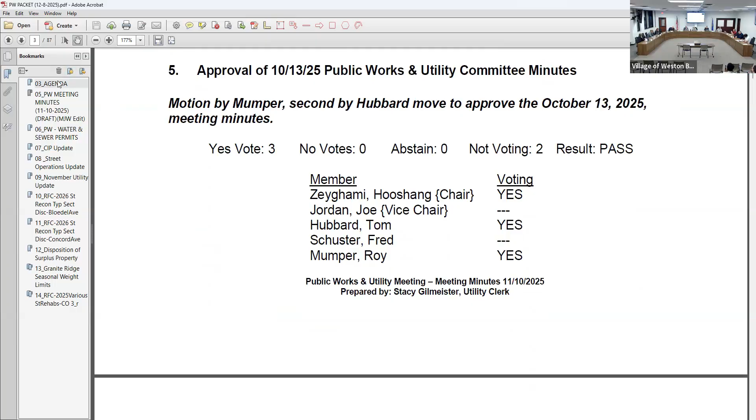Item 6, acknowledge November 2025 water and sewer permit. Move. Is there a second? Second. Discussion? All in favor, signify by saying aye. Aye. Opposed? I have it, thank you.

Item 7, CIP update. Michael? I guess our projects are done for the winter here until spring. Fuller, Weston Ave, and Schofield Ave all got paved before the snow flew, and stayed, I guess. There'll still probably be some restoration - they'll have to be touched up on Fuller, Weston Ave and Schofield Ave come springtime.

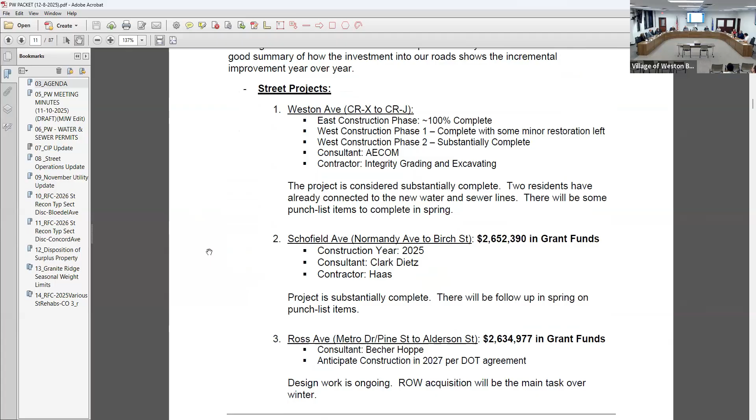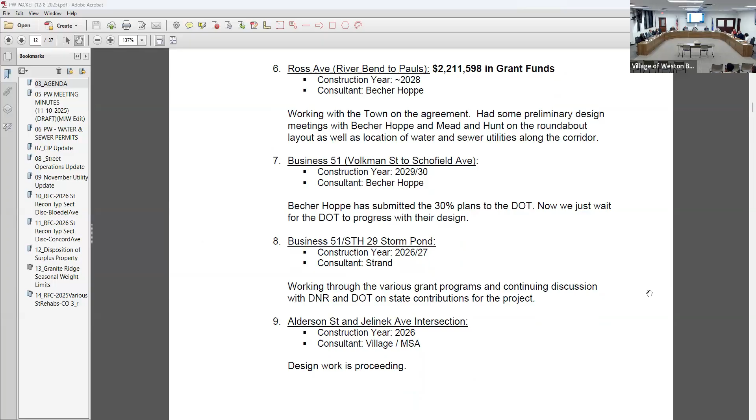Still working through design with the Ross Avenue projects. We've got a couple agenda items for the Bloedel and Concord Avenue projects coming up. For the storm pond with Business 51 and Highway 29, still working through some modeling concerns that the DOT and DNR had regarding the waste loadings for that pond, so trying to get that coordinated with them. Hopefully the DOT sees the benefit in it for their right of way and will contribute to that project.

We'll be working on the right of way for the Alderson-Jelinek intersection. Still a little back and forth with the Public Service Commission for the Well 3 PFAS pretreatment project to get the construction authorization from them. But for the most part, it's just small items they were nitpicking, so we should have that by probably the end of the year - end of the month, I guess I should say.

I did put together a little bit of a review for our pavement work in 2025. Pretty much all that we had planned to get done got done, except for a small portion of Birch Street here between Weston Ave and Cranberry. That one did not get pulverized and taken care of before winter.

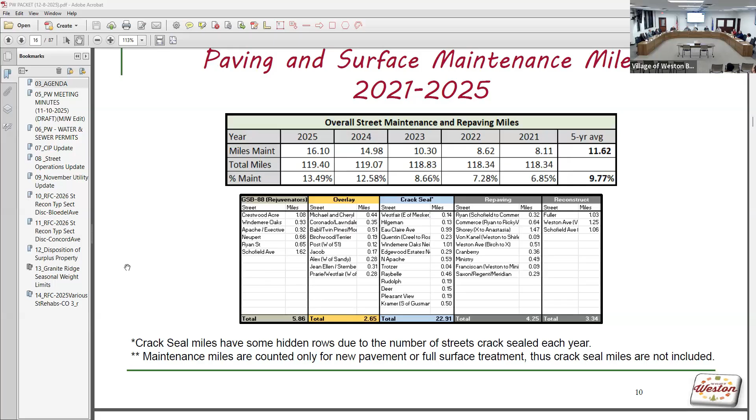Overall, as far as surface maintenance miles on our asphalt roads, we either put new asphalt down or did a seal coat treatment on 16.1 miles, which is right at 13.5% of our total miles. This doesn't include crack sealing, which we did on about 23 miles of roads. The goal is to try to get about 1/5 of our streets, so we're pretty close there this year. That way we can crack seal every road generally once every 5 years, or once every 4 years. There's some streets we just don't crack seal or try to get to because they're too far gone.

Then Forrest and Steve Lake, one of our crew leaders, went through and did our PASER ratings this year, so in kind of a summary of it from 2009 through 2025 here. I guess maybe the graph is a good one to look at.

So we kind of hit this peak in 2013. 2012 was a year where we did street reconstructions as our last year through kind of that early 2000s, and then we took a break from 2013 until about 2019 on any new roadways or reconstructions. That really showed in our street ratings. Then in 2021, which would have been the first year after, is where we kind of saw an uptick again in our better pavement ratings.

We still kind of had this poor rating slowly decrease, and really the fair to good roads is what increased during that time period. Then as we start redoing roads, we were able to help get some of these fair to good back into excellent condition, and still take care of the poor to fair streets.

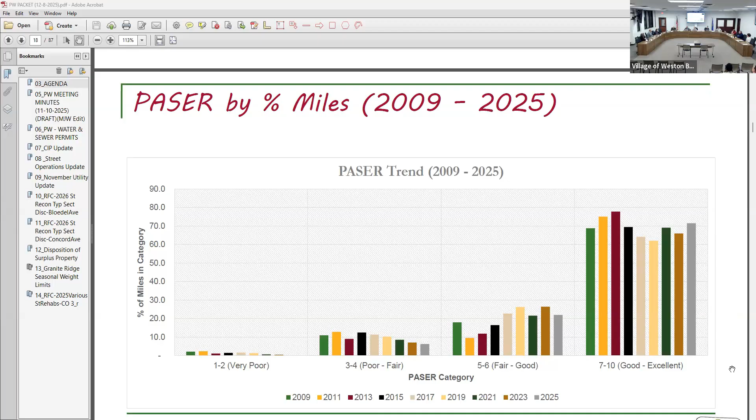We can spend a lot of money to try to make sure all of our streets are always in that 7 to 10 range. I don't think it's realistic to say we're never going to have anything in the 1 to 4 range, but we try to keep those as low volume streets with not a lot of traffic. Our arterial roads, we try not to get too far below a 6 because those are heavily traveled roads, and if they start to become too bad, it becomes hard to appease the public because that's what they see for the most part.

How much more is left to do at the hospital? Just Birch Street was the last one. So that's it? Weston after Cranberry, yeah. That's why we're issuing that change order? Correct, yeah.

That stretch between Alderson and Birch being paved, at the bicycle path area - that's gonna be paved, or is already paved? That's paved, yep.

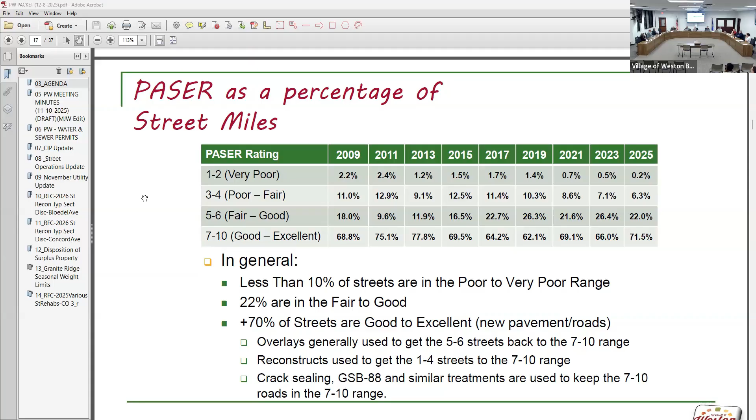And the lighting - the lighting was not approved or recommended. Probably in October, I was gonna say maybe 3 meetings ago. We shared that with Rothschild and they didn't come back with anything else. I thought you were gonna talk to Tim. Yeah, we did. Rothschild didn't bring back any sort of secondary proposal to that.

Anything else? No, just thought that was a nice little summary as we were plugging in and submitting our road miles to the state this year, kind of keeping track of how that trend looks over the last 12 plus years, 16 years. You take that survey every other year then? Every 2 years, yeah. So every 2 years we have to submit our street ratings to the state.

What is the very poor section? Probably Bushka Street - I'd have to look at what all the 1s and 2s are. Sometimes they're gravel roads, probably East Nick Avenue. Is that Bushka Street still original pavement in there? There's parts of it, yeah, this past year we had to pave probably 100 to 200 feet of it just because it blew apart.

So I thought there was no base course in there. It was granite, so when we redo that we dig out the top and put in a foot of base and repave it. But that's where we try to hedge - for the 6 houses on that road, it's passable, it's okay, not the best road out there, but when it comes to the overall picture we try to balance that. It's hard because everybody pays taxes, everybody wants their road nice, so we try to take away a little bit each year on that.

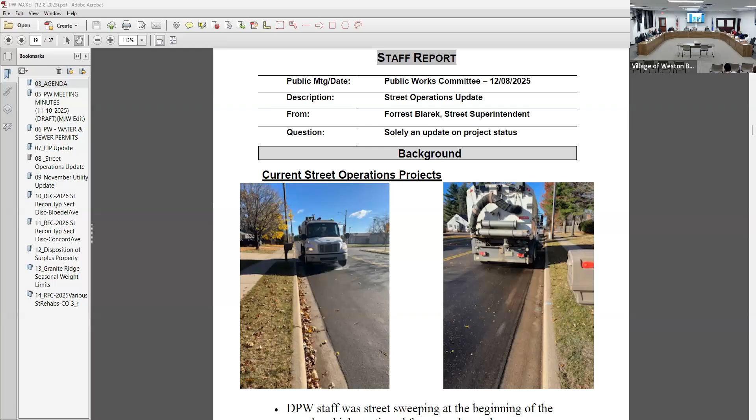Also finished up the curbside pickup. Crews were able to stay on schedule this year with both leaf and brush pickups - that was one of the first years ever. Once they went through their scheduled pickup, they went through neighborhoods that had put out more piles afterwards. Some areas got picked up 3 to 5 times, so we were able to stay on task with that.

Question - is there a better way to pick up brush? It leaves a lot of debris, people complain about it. Yeah, and I tell them, pick it up with a hand loader. With the smaller piles, the driver of the dump truck usually gets out and picks them up by hand, or any sticks that fall on the road, but with the massive branch piles, it would never get done if we had to pick it up by hand. I don't think there's any other way - I just tell them it is what it is, they do the best they can. But they still complain, you know.

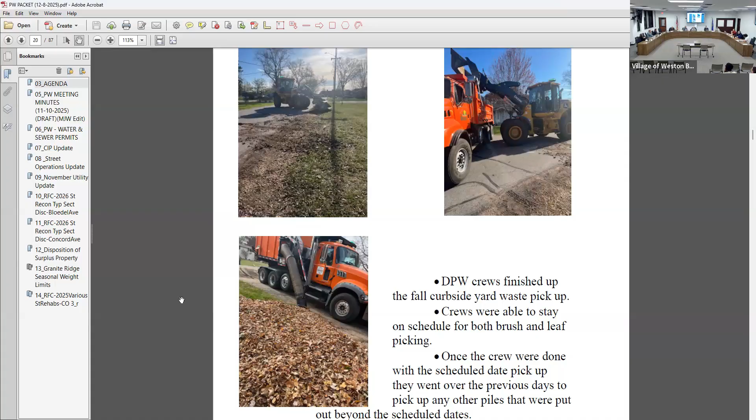Sure. Would it be good for us to encourage people, if they have a really small pile, to just talk to their neighbor and combine it into one? Absolutely, we could add that to our posting. Yep, just to put it in one bigger pile and the areas would be less messy then. That's not a bad idea.

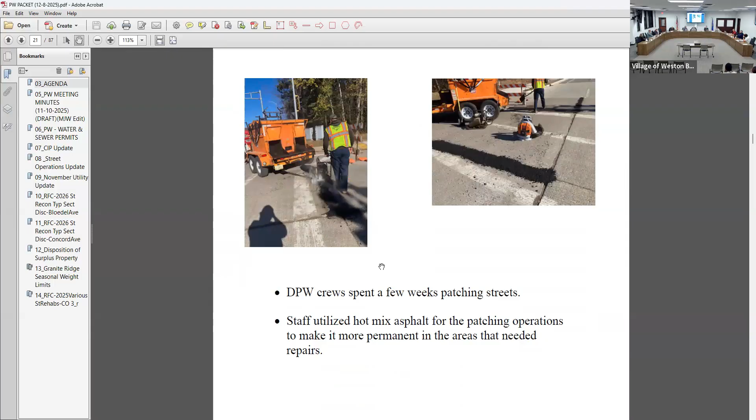So then the guys were out patching while the hot mix plants were making blacktop, filling up all the bad areas that we found. Trying to make it permanent throughout the winter, so we're not going back and repairing with cold mix.

I also did the thermoplastic around manholes and water valves. We had 2. Is it above the road or just flush with the road? It's flush, yeah, flush with basically the rim of the structure. There's no bump up or anything. That's awesome. It helps prevent the snowplow from hitting the actual structure, damaging the structure and/or damaging the plow blades on the trucks.

It takes 2 crews, two staff members each. We send them out, they pick the actual plow routes, and we want to apply these to anything that looks like it's sticking up off the pavement surface. They heat these up and stick them down.

So I guess to clarify that, these are ones that are sticking above the asphalt surface, up a little higher, and would catch on the plow blade. So these rings kind of ramp that, so as the plow comes through, it ramps up and over that.

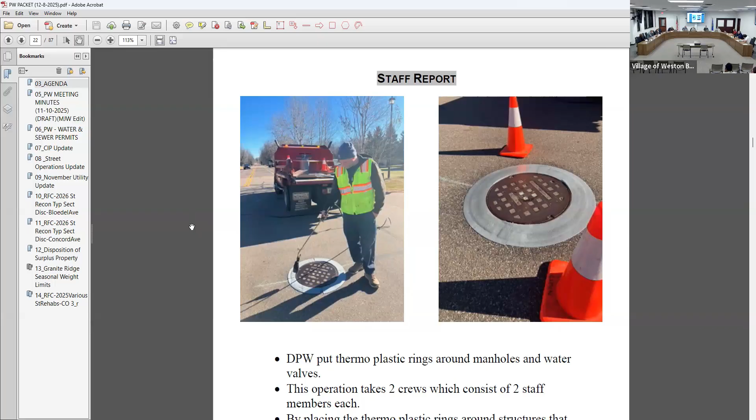I'm just gonna bring this up because a friend of mine does insurance claims for State Farm. He was at a claim recently. It was some kind of a truck like that parked on the side, they were doing some kind of work, failed to put out the safety cones. A bicyclist came around the corner, I don't know what the guy was doing, but he went right into the back of the truck. Of course, now they got a big lawsuit, and it's all contingent on did not follow safety procedures.

Yeah, I don't have the procedure for that, I don't think we have one. I would recommend that the first thing those guys do is throw out those safety cones. I mean, again, I'm not dictating, I'm just suggesting.

My guess is those two cones next to the back end of the truck are the two cones that are out here. A lot of times they'll put the cones out.

Can I finish my sentence? So the two cones in the back of the truck more than likely are the two cones out on the roadway here. We put them out as this cures, so vehicles after we leave aren't driving over it and tracking it, because it does heat it up, so it's tacky. Once it cools off, then we come back and grab the cones. The truck likely has its flashers on.

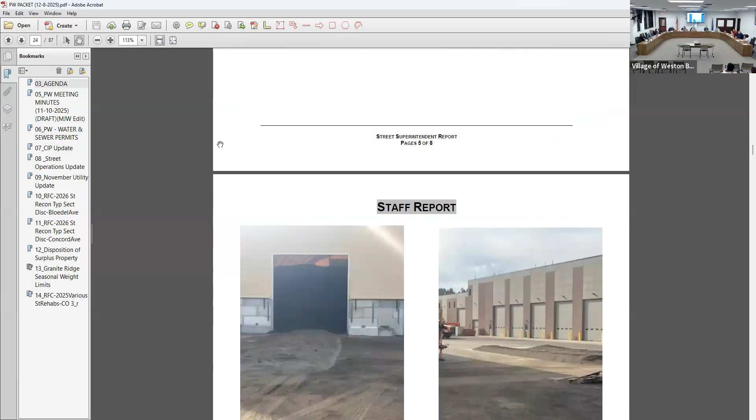Before the snow flies, in the backyard here, we had all the light poles from the Schofield Avenue project taken off, and Banner had delivered them back here, so we stripped them all down, palletized everything, organized what we're keeping and what's getting sold as surplus. It took some time, but you guys got that done, and moved it to a place where it's not gonna get hit by the snowplow. That was a bad spot for it, so we had to get that moved.

Are those light posts extra? No, those were the ones replaced off of Schofield Avenue, the old ones came here. What will we eventually do with them? They're in item 12, they're for sale. We kept a certain quantity as backups because we have other lights out in the system, so we'll have a little salvage for inventory, but we didn't need all of them.

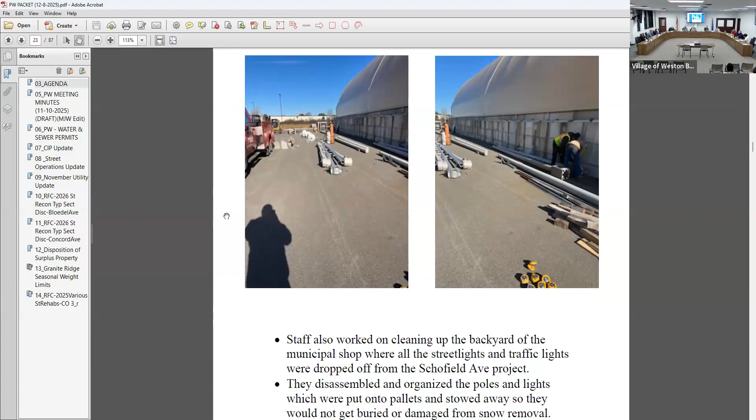We hauled in our sand mixed with the salt, about 340 yards, to fill the shed up for this year. The staff lays it out with the dump truck, sprinkles about 2 yards of sand per load for the mixture, and puts it in the storage shed.

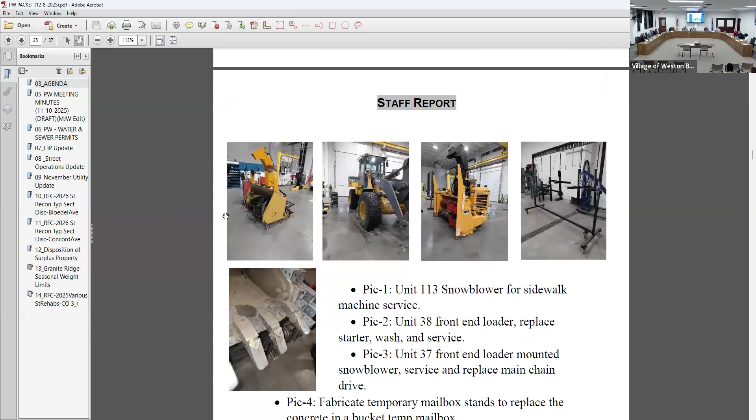And then for the shop, we had the snow blower for the sidewalk machine serviced, number 38, then the loader had its starter replaced and serviced. The big snow blower, front end mounted, had its main chain drive replaced. We fabricated the mailbox stands to replace the concrete in a bucket temporary stands, and repaired the mini excavator bucket. The other repair isn't pictured.

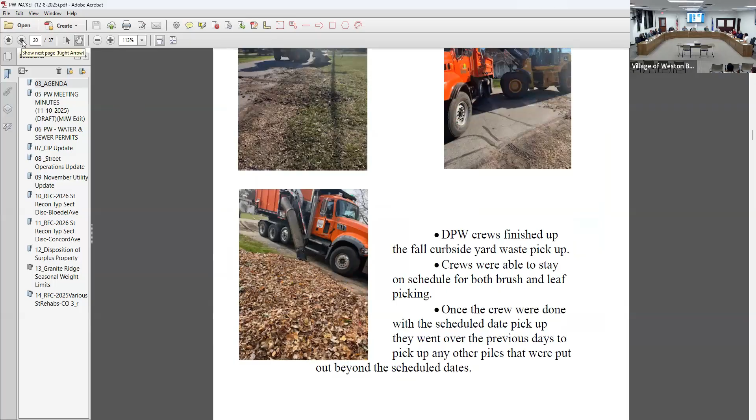Both 29 and 69 had a seasonal changeover. Both those trucks are used for leaf collection, so their radiators get really packed and condensed full of fine particles from that. The mechanics have to separate the three different types of radiators and intercoolers, take them all apart, and clean them thoroughly before putting them back. Number 60 also got its air conditioning condenser replaced.

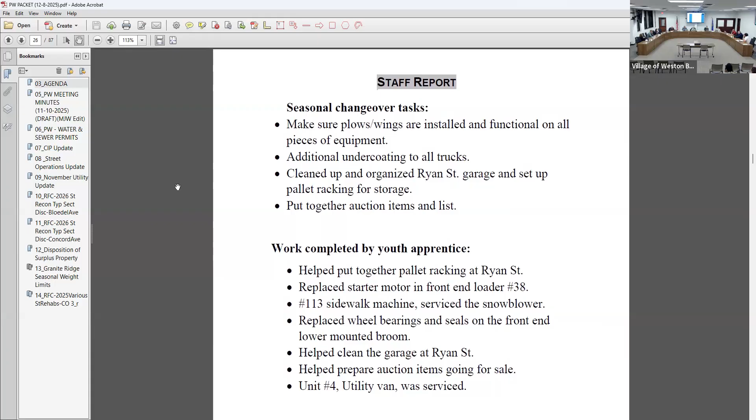Then the changeovers, making sure the plows and wings are all installed and functions are all working, plus additional undercoating for all trucks.

I cleaned up the Ryan Street garage and set up pallet racking for stuff to get stored there, and put together the auction items. The youth apprentice helped out with the pallet racking.

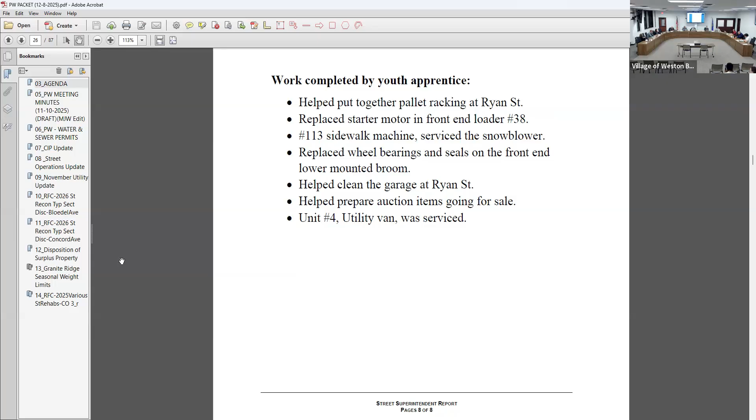He replaced the starter motor on 38, did the service on the sidewalk machine, replaced wheel bearings and seals in the front lower mounted broom, helped clean the garage at Ryan Street and helped prepare auction items going for sale, and also serviced one of the utility vans.

That's all I got. Yeah. Question for the board?

Okay, item 9, utility operation update. Sure, on the water side, we were able to get a number of items done before it got too cold.

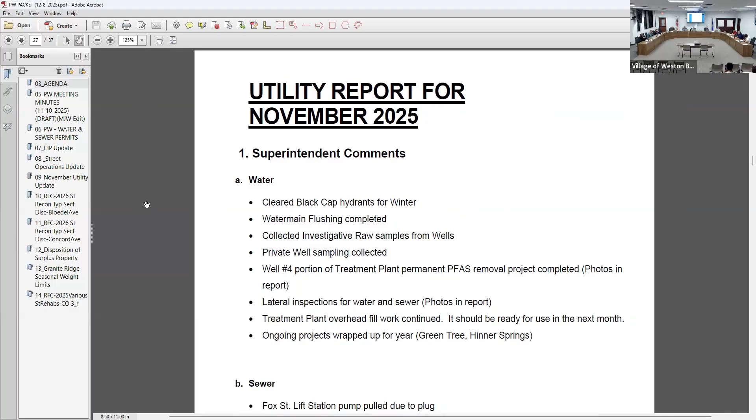Cleared some of our black cap hydrants, those are our non-draining hydrants that are in use and need to get the water out of them before the freeze hits. Completed our water main flushing just in time as well.

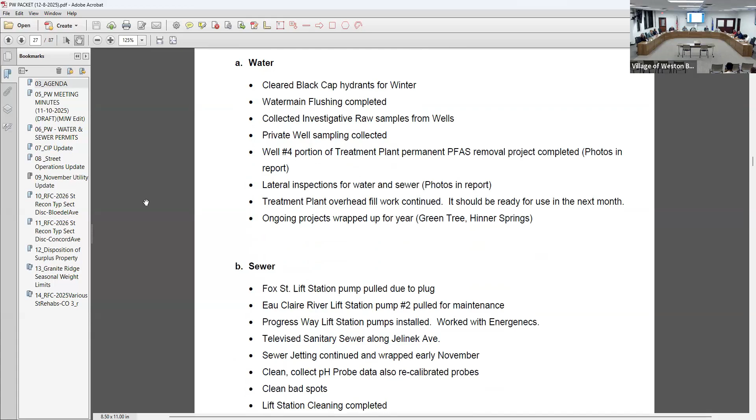Continued with our investigative quarterly raw samples for all of our wells. Once we get that, I can probably put a new graph back into the report maybe next month.

Continued with some of our private well sampling. The well 4 portion was probably completed at the last meeting, but there's still a little bit of punch list stuff, items, some tank labeling. Hopefully there's no more interviews that need to be done about it.

Boucher, you can still call, just not Wednesdays at 2 o'clock, that doesn't work. All right, I'll do that.

We continued with a few lateral inspections, they're slowing down. A couple homes actually did connect to the new Weston Ave portion of the utilities.

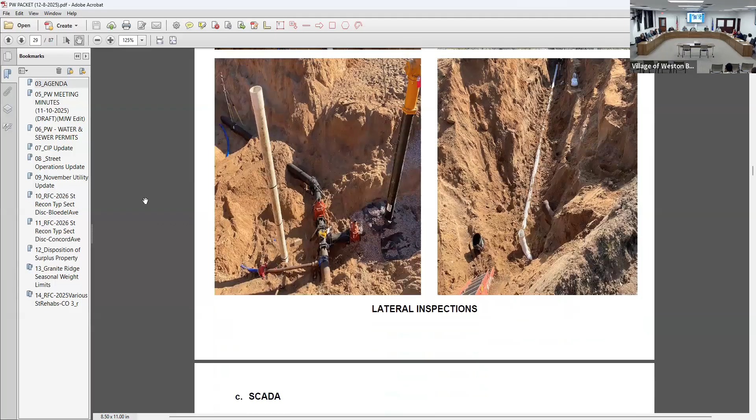Over at the treatment plant, the overhead fill work continued. It should be ready hopefully soon. We did get the laptop ready that's going to be needed out there for doing all of our accounts and for people who utilize the overhead fill. Flow Point, that contractor, will be out here hopefully soon to get the overhead fill back and functional. I think there's some contractors looking to utilize that stuff here.

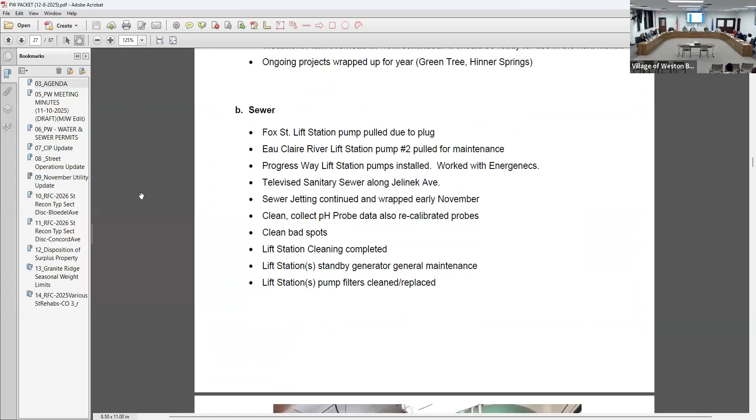As our ongoing projects wrap for the year, there's maybe just some utility locates on some of the private property within some of the developments going on. On the sanitary sewer side of things, a few plugs we had to pull out of Fox Street lift station, and the Eau Claire River lift station also had to be pulled. We got pumps installed at our Progress Way lift station.

We had some televising needs for some of our upcoming projects. We were able to get a portion of Jelinek done. We're also working on the Ross Ave portion of the sanitary for the upcoming Ross Ave roundabout, and a couple other locations as well. We wrapped up our sewer jetting and our lift stations were cleaned.

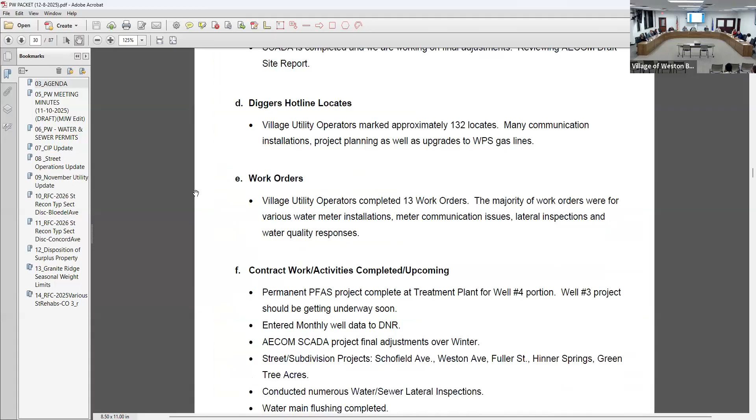We collected our pH probe data and recalibrated some of that stuff. Some general maintenance items at the lift stations were done. On the SCADA project, we probably need to touch base again and see exactly where we're at. I think all of that is functioning as it should, maybe there's just some tweaks and alarms yet.

Our diggers hotline stuff is still happening. Hopefully that slows down, not too many work orders. We've touched on most of the contract work. For the PFAS well 3 portion, hopefully we'll get some answers from PSC like Michael mentioned. I guess that's it for the work we've done.

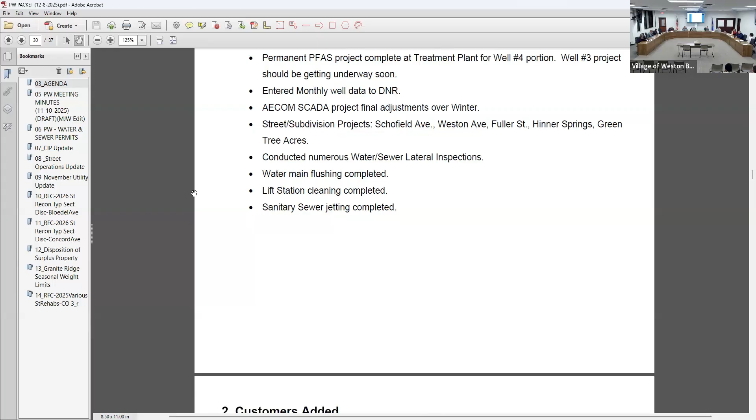Other than that, we have our customers added. One note on our water pumped: you might notice wells 1 and 5 are significantly low for November. I had touched on that - now that well 4 is pumping through the PFAS treatment plant, we wanted to really reduce those. So you can see well 4 is significantly up from previous, and wells 1 and 5 are down.

We basically just pumped that to waste enough so we could get our quarterly compliance sampling for those 2 wells. We had talked with the DNR about what we could do. You could put them in a few different states - you could actually make them inactive, but then you'd have to do some sampling to get them active again. Or, the easiest one for us was just to pump to waste. So I think they did 2 or 3 bed volumes of each of the wells and then sampled. I think that's probably how we'll continue with that until there's a need for those 2 wells.

We'll probably have a shutdown at some point once the well 3 project gets going as well, so we'll probably need those again. But hopefully we'll see a little bit of water quality improvement on that portion of the village now that they'll get more of well 7, 8, and 4.

Is the pumpage still the same out of 3 of them? Yeah, we have capacity - it's really no different when we were down well 3 and 4. We had to pump 1 and 5, but we were able to keep up with all our capacity when we were still waiting on 7 and 8. So having 7, 8, and 4, and 6 really just serves kind of the northeast portion of the village, but 7, 8, and 4 can sustain the main base of our distribution system.

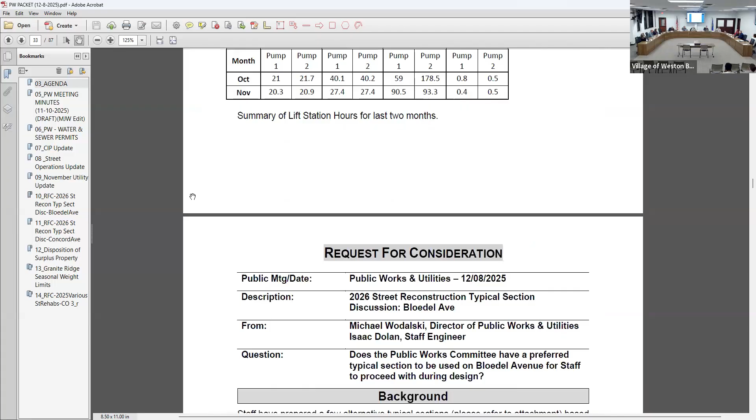When is AECOM gonna be finished with the SCADA system? It's done for the most part. I think we need to review the final draft of the report and then get our guys on it. That's probably something over the winter here we can kind of dial in.

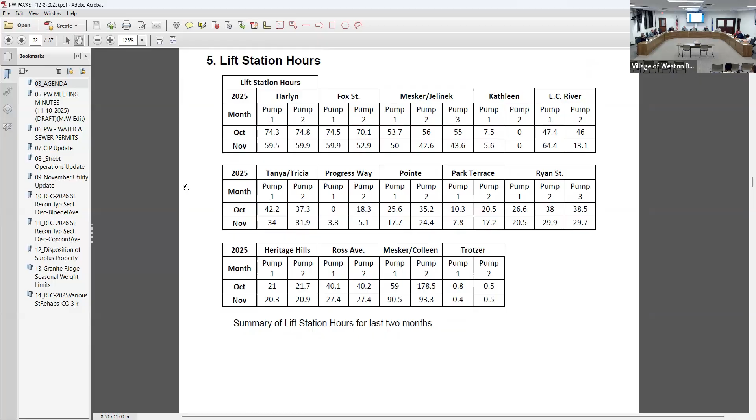It's really, I don't think there were any big items, I think it was kind of just making sure there's still some alarms in the background where we didn't understand why they were being engaged when there shouldn't be alarms. So I think we need to go to each station and almost do a troubleshooting, seeing when this alarm calls out, making sure that it's actually relayed to the right location. If it's supposed to come to Stacy during the daytime and it goes to our answering service after hours.

So just making sure what alarms are needed are actually being enabled. Is there a contract as T&M? No, so really the contract is done. The biggest part is our guys have noted things they have questions on, so it's going through that to see if it was part of the original design, or if these are additional asks now of, hey, I like that it does this, can it also do that? So that also should be part of it.

Well, I guess they're working... how long have they been working on this project? What's that, how long they're working on it? They really haven't done anything over the last probably three to four months, because we haven't had a chance to thoroughly go through it with everything else going on.

So it's been in Josh's packet, but we haven't pressed anybody on it and everything's been working. So as he's saying, it's something this winter we'll go over and comb through to make sure that we got everything we needed to have.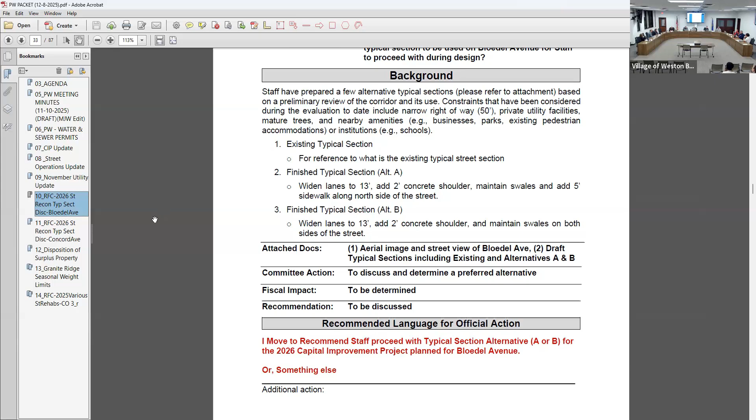I can start and then Ike will probably carry it the rest of the way. As we go through our street reconstruction projects, it's a little different than a new road. We don't always require the same approach since we're fitting a reconstructed road into an existing neighborhood and environment.

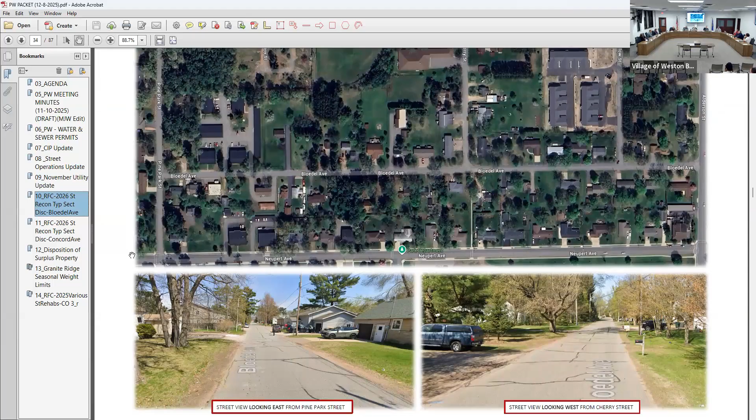So we try to look at whether we can get pedestrian accommodations in there. Bloedel Avenue has a 50-foot right of way, so it's tighter than a 60 or 66-foot right of way. There are existing mature trees and more utilities, like power poles up and down the roadway. So we looked at a few different typical sections that could be utilized.

I'll let Ike go through the proposed typical sections and the options we have to look at right now. As Michael mentioned, the right of way is only 50 feet, so compared to our other corridors that have 60 or 66, we're already losing 10 feet off the top. Now, it is a residential corridor.

It does have access to Kennedy Park off a pedestrian path that cuts through the neighborhood near Willow. So there are a couple different alternatives provided. One shows a sidewalk on at least one side, but you can see how tight that gets at that corner. We would widen the pavement, preferably to 13 feet with 2 feet of concrete shoulder, to help stabilize that pavement and give a better surface for residents.

Some of those street views you saw show people parking on the road. So there's not really a gravel shoulder anymore - it's more dirt and grass that's failing along the edge of the road because people are trying to park there, but it's tight.

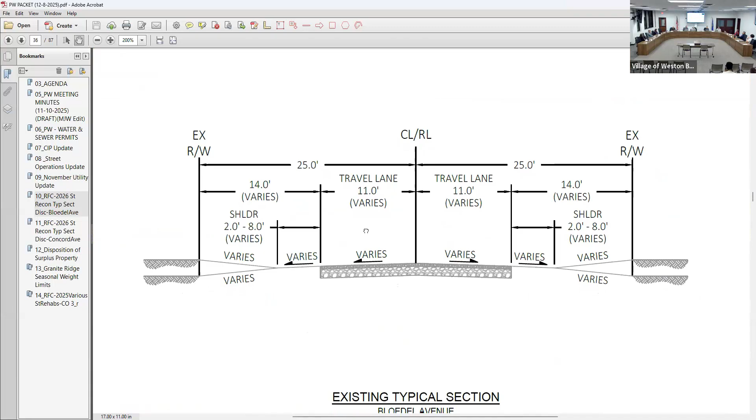So again, we're trying to provide accommodations to show that a sidewalk can get in there, but honestly it's going to make it a lot tighter throughout the entire corridor. There's also an alternative that puts it back the way it is, with a little more asphalt, but just swales on either side.

I got a question. If the sidewalk goes in, are people still going to be able to park in their driveway without being over the sidewalk, or is it going to be that close? I've run into that issue before.

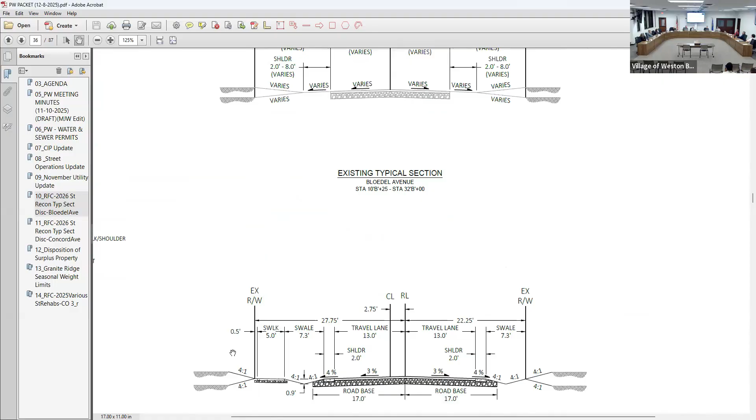Yeah, that's another reason why in the typical section the sidewalk was put on the north side. There are some homes on the south side of the road that are extremely close to the road. I wouldn't say I've looked at every single driveway, but a lot more of the driveways on the north side are set back, with garages set further back. That is definitely a consideration - this one here looks really close, probably right on it. I think there are 3 houses near Pine Park that are the closest to the road.

This is very low traffic, I assume. I understand it's very low traffic. One of the things I looked at - I said to myself, I've never driven down this road. I've been in Weston for 26 years and I've never once driven down it in my life. I looked at it on the map and roughly knew where it was, but then I looked at the road and thought, would we build a sidewalk for anyone, or no one?

With Target and the schools there, I do drive that road, and I think if you can get a sidewalk in there it would be beneficial, just because it's a road anyway, and you'd otherwise have to walk on the road with kids. With cars parking on the road, like in some of those photos, if you are walking, you're going to be in there tight.

But I guess the other point would be that, with the proximity of the buildings there, there just really isn't a lot of places for the cars to go. It probably got more traffic this last year, but now that we aren't doing work on Schofield Avenue, I'm not really sure if that would maintain.

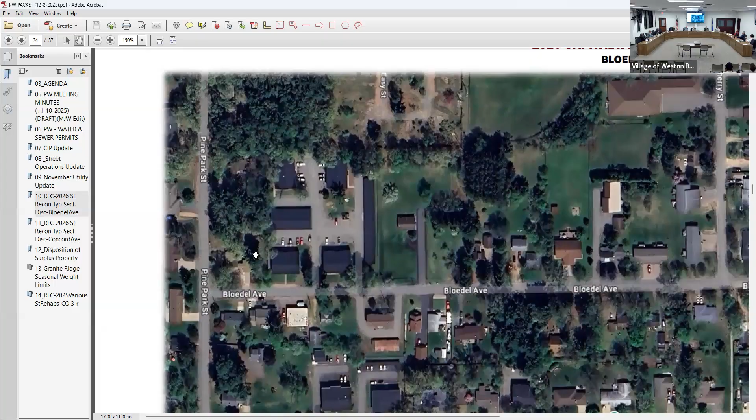I guess from that perspective, it'd be a benefit to half the street. There's sidewalk on Alderson, but there's no sidewalk on Pine Park that's consistent right now that it would connect to. The only consistent sidewalk we'd have is just south of there on Neupert, or north on Schofield Avenue. It's not necessarily connecting anything where you'd have residents coming through it.

Typically, in my opinion, it's children that are out there. If they're walking to school or whatever, they won't cross the road to where the sidewalk is. They're gonna still walk on the road. So I guess that's my question, is it worth the expense? I guess that would be a question for committee.

Honestly, if you provide it, people would use it. I'm not saying everyone's gonna use it. There's been other neighborhoods I've driven through, you're exactly right, just because there's a sidewalk there doesn't mean someone's gonna use it. Where I live, there's sidewalks on both sides of the road and there's still people that walk down the road. So you just don't have room for that on this road, there's just not a lot. Yeah, I understand that.

Anywhere on that corridor, do you have any information, or did we ask any of the residents what their thoughts were? No, I was hoping to get some feedback here and then present that at a public meeting with the residents along that corridor.

So if committee or board doesn't believe that we should have a pedestrian accommodation through there, then I'll take that typical section to the public meeting with the residents and not present it that way, but just say this is what the typical section is, and we'd get feedback on whether or not they'd prefer to have sidewalk or not. The typical response will be the people that are getting sidewalk are gonna say no, and the other side is gonna say yeah, we should have them.

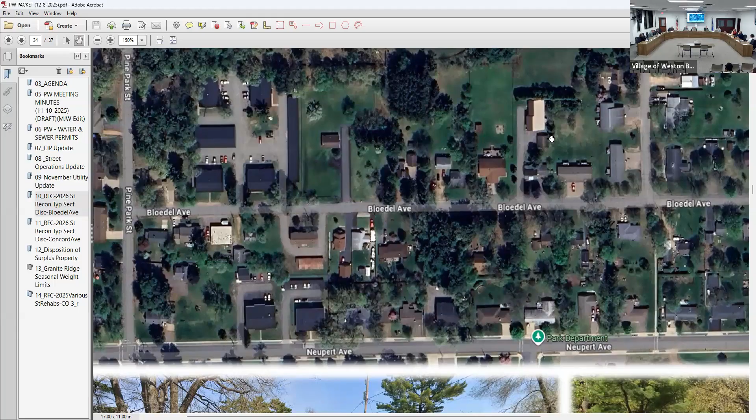It's easy enough for us to show it in a design, for me to include that in what I present to the public. It's not getting constructed at that moment, so I can present it that way and depend on the feedback from them. If it really helps the local residents, at least the majority, it can be presented that way and get more feedback.

You got the road 13 feet and 2 feet of concrete. So the bicyclist can ride on the road and use that 2 feet of concrete as part of his riding area. He can't be on the sidewalk or any other place. Just keep him on the road because that's what the law is - they can't ride any place but the road because he's another motorist out there.

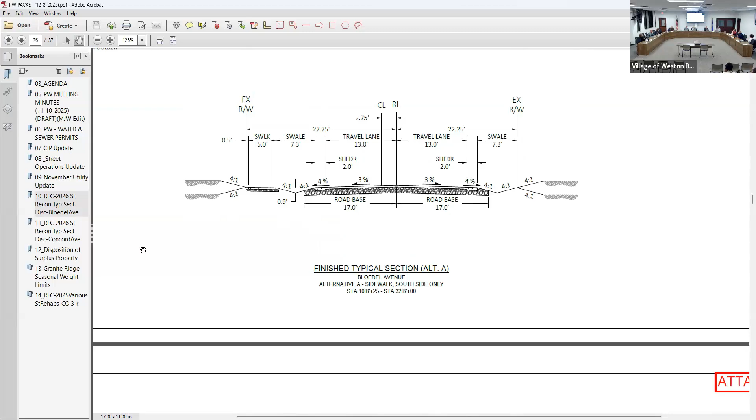Given how wide this right of way is, we wouldn't be able to do a designated bicycle width - it'd just be shared use of the roadway. That's fine, because right now you got 13 feet plus 2 feet of concrete, that makes 15 feet, so that's wide enough for bicyclists to ride in there and pull to the right and be safe.

Then you have your sidewalk, 5 feet. I think that should do it. But there's another one - you got sidewalk on 2 sides of the street too, don't you? Not on this one, on the next section I think. That's another alternative for that one, just because there's a lot more width here. It's a different beast altogether, that corridor.

But for this one, we really are trying to add more width so it does accommodate the residents there, from 11 to 13 feet in each direction, plus the 2 feet of concrete. That's alternative B on the second one, on Concord Avenue.

You got 14 feet road plus 2 feet of concrete, that makes 16 feet. That's great, I mean, but you got 66 feet right of way. And then you got the sidewalk on 2 sides of it. As for if we can see it's gonna be used, because that's important.

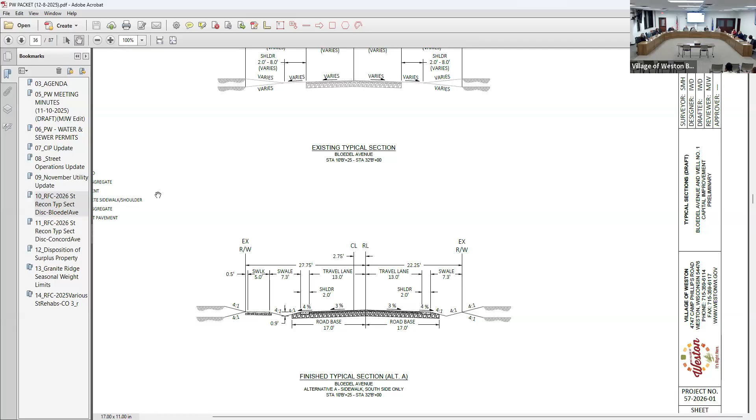Which section are you, Concord? No, Bloedel, this is Little. Oh, okay. For the 2026 capital improvement project plan for Bloedel Avenue.

I'm sorry, you're recommending number one? The alternative A is the one with the 5-foot sidewalk. I'll second it. Could you please make a part of your motion what street you're talking about? We're on Bloedel Street, this RFC is just for Bloedel, there's another item for the Concord. So I just made the motion for alternative A on this agenda item.

Is there a second? I second it. Discussion? Go ahead, Michael. How do you address stormwater in that area then?

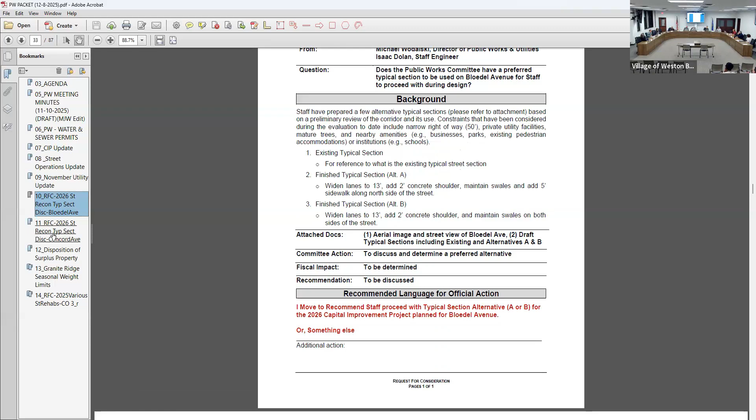So those swales are still there. Right now it's kind of intermittent - it either somewhat drains off the road, or the roadway is sometimes lower than the adjacent. There'll still be this ditch between the sidewalk and the road that gets put in, and on the opposite side there'll be a ditch as well.

Do they just drain into the ground or actually go to a storm sewer? There'd be some storm sewer - there is existing storm sewer on Bloedel, so it'd be tying into that existing system, so you don't have to do as much from a reconstruction standpoint, not as intensive. If we were to try to put traditional curb and gutter in here, we'd run into a lot more issues with DNR compliance, and we'd be trying to buy land to put in a storm pond or do something kind of crazy.

So yeah, we'd still need to utilize a kind of vegetative treatment system through here. Other question?

If there's no question, all in favor of alternative A for Bloedel Avenue - is that avenue or street? I think it's Bloedel Avenue. Signify by saying aye. Aye. Opposed? Okay.

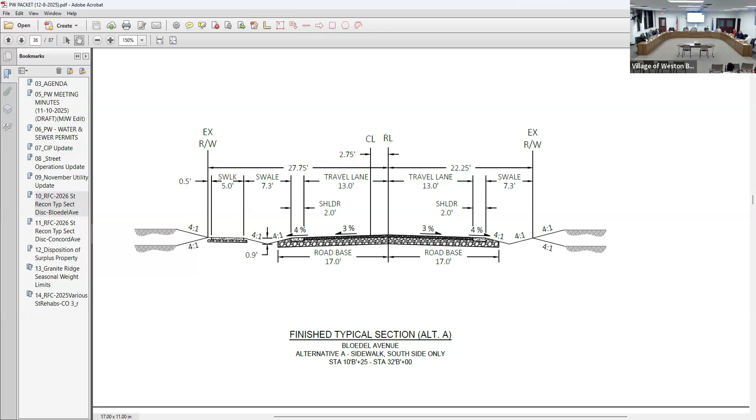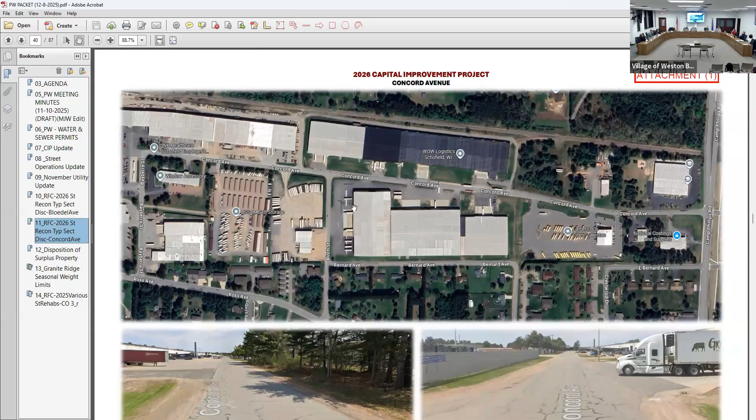This corridor has a lot of semi-trailer traffic. Some businesses, or at least one in particular, use the road to park their trucks just to get direction on where to go - they're there for a few minutes and then move to wherever the docking bay may be. So that corridor is very active with truck traffic. Nothing high speed, it's all very slow moving, but it's very active throughout the entire day, day and night.

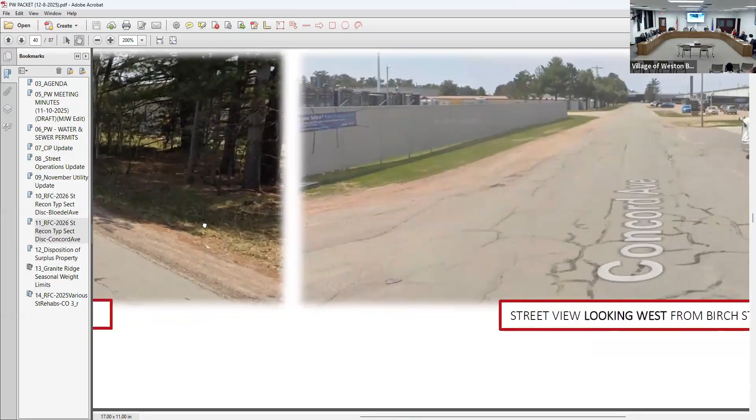So the existing pavement - I can't remember exactly, but the minimum for the majority is about 11.25 feet. It does widen out a little in some spots, but it's kind of irregular around Birch Street. It's mainly ditches with existing storm sewer also along it. There's no pedestrian accommodation anywhere through this corridor at all, and we have 66 feet of right of way available.

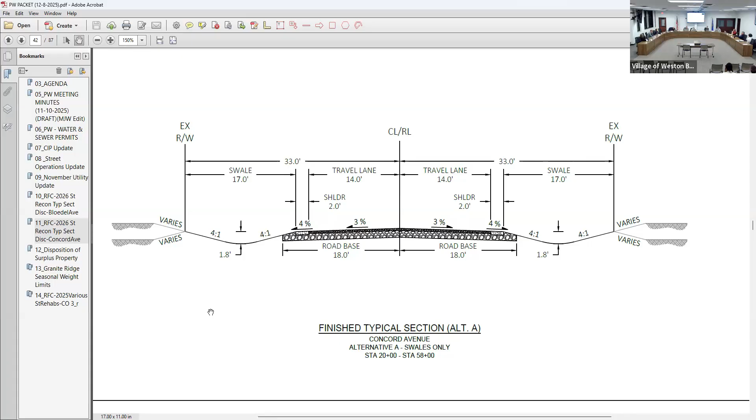So the first alternative here was essentially to replace it in the same fashion it currently is, where we have swales, give them a little more asphalt with a reinforced shoulder there with concrete, but nothing really outside of that main corridor.

Second, alternative B would add pedestrian accommodations on both sides - just a 5 foot sidewalk hugging the outside edge of the right of way going through there. This would probably clean it up a bit, especially where they have a lot of parking that isn't necessarily on their property, kind of drifting into the right of way. It would help define the right of way along some of those industrial properties, and then also have the swales there to drain to the existing storm.

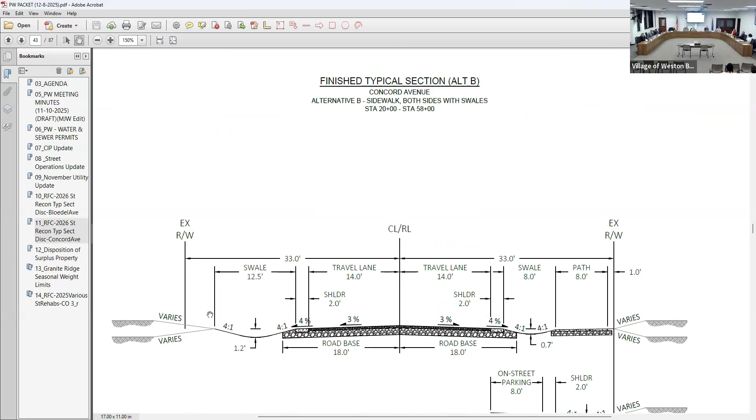This alternative is actually two - alternative C and D. Alternative C is the main one shown, with swales and then a wider path on at least one side. Alternative D is essentially the same thing, but widens the roadway on one side instead and eliminates any standalone pedestrian accommodation outside the roadway pavement. So that on-street area could be wide pavement if anyone were to pass there, but it would provide a place for a vehicle to temporarily park along that corridor and still fit within the existing right of way.

So alternative D is kind of targeted for the area in front of WOW. Currently we maintain a probably 12-foot gravel shoulder there, so when those semis park, they're not on the roadway with how tight it is. If they were to park on the road, trucks wouldn't be able to pass. So we have a very wide shoulder there that we go through and grade probably at least monthly throughout the summer, and after any major rain events, because they'll knock it out and it becomes heavily rutted.

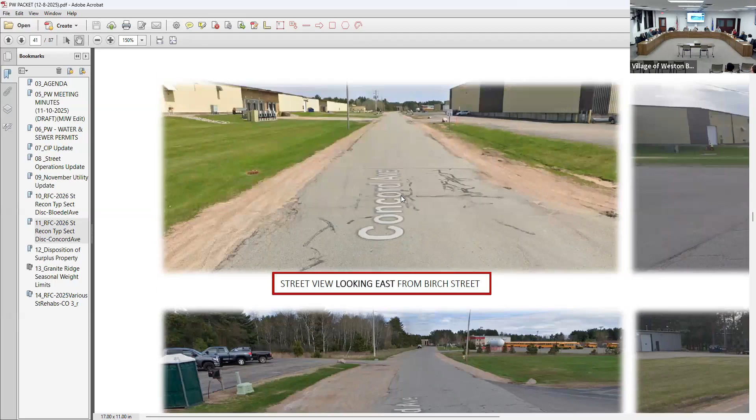So that was the thought there - it maybe wouldn't be for the whole stretch of the corridor, but maybe for that stretch from about the Lamers through the initial maybe 2 driveways of WOW, just so that - since they currently utilize that area to park their semis, unless we're going to tell them they can't park on the road anymore - this is one way to accommodate that and keep it cleaner and more easily maintainable.

Where would they park if they didn't park on the road? There's a lot of trucks waiting to be unloaded. Yeah, we tell them you can't park on the road and you have to try to figure out something.

Drive around this, or in between these two driveways and unload? This green space, we'd say, their own dedicated park. Yeah, they do have quite a bit of asphalt on the south side where they could temporarily park a truck.

It's just that they then have to walk from that location to their- I don't know, it's not really part of the building, right? It's kind of like a trailer out on the front. I think this bump out here is where the drivers check in, and that's where they get direction on where to go. So they all park right around that area temporarily, then go where they have to go.

Is there a hybrid where you can get the parking but still have the trail, at least on one side? Yeah, I guess maybe there's probably an option E in here somewhere too, where in that stretch you go with some on-street parking on this side, and then on this side you try to fit in a sidewalk. So maybe you'd have to kind of Frankenstein this left-hand side with this right-hand side.

I think the question is, Hushang, how much asphalt should they realistically budget into this? That's a 5-inch asphalt. I'm thinking you want heavier asphalt, but I don't want to make a resolution that prescribes that for the entire length, because that would be a ridiculous amount of additional expense. Wherever those trucks are going, that's where it's gonna be.

So you guys are talking about 2 different things. Trustee Jordan, you're talking about the width of the road, like do we want 28 feet or 32 feet of asphalt. Trustee Zagami, you're asking about the thickness of the asphalt. Yes, it's probably at least gonna be 5 inches of asphalt on 12 inches of base.

But we're not even in pavement design yet. Right, we're trying to just figure out how wide, what is the horizontal look of this road before we worry about the structure of it. We understand these are gonna change possibly, but not significantly. We're just trying to get a starting point, the numbers you put in there just to give us a picture of what we're looking at.

Same thing with the sidewalk, there's no dimension in there either. It's just 5 feet wide. Is that asphalt or concrete? Anything 5 feet would be concrete, anything 8 feet is an asphalt path. We're trying to get as much figured out before we get into those details, because once we start adding them, if it changes a lot, that's a lot of rework to redo.

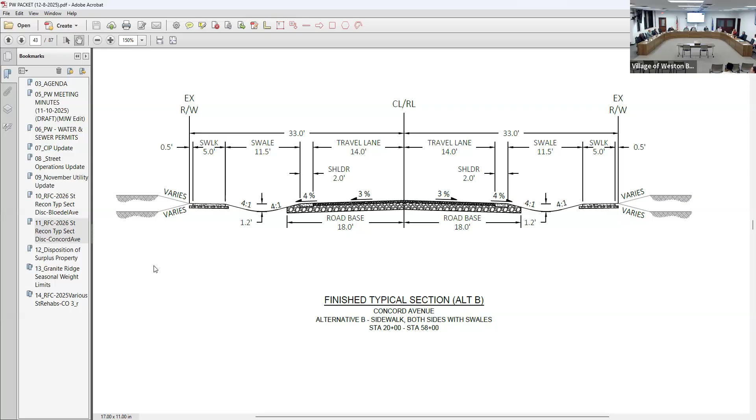I know this isn't residential, but I still think you should be putting a sidewalk or trail on one side. But you don't want it on the side where the semis are. Right, well that's where you could jog it over to the south side, however you lay it out, but I still think there should be a consistent sidewalk on one side. I think if you put the sidewalk, people will walk on it at lunchtime.

One other thing, we do have a utility easement at Aspen Street Extended right here. So even if we did something through here and over to Camp Phillips, maybe that would be a spot where kids from over here walking to the charter school or elementary school would have a way to get there, without putting them on pavement with the semis.

Wait a minute - if we did a portion, I would ask if we could go to Birch, because Birch is how you get to the pedestrian crossing. Yeah, if we did a portion, I'd say Birch.

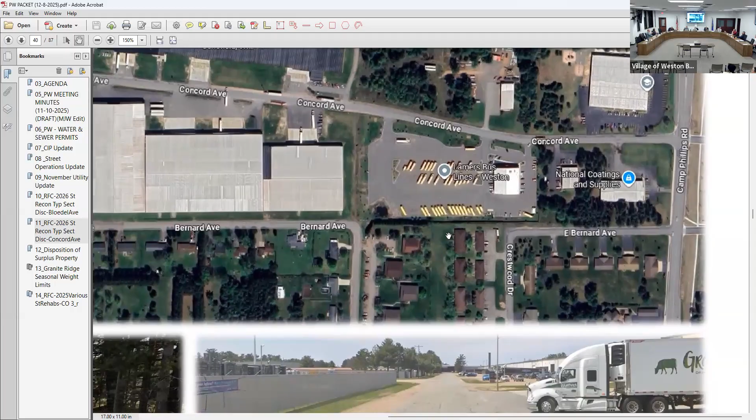Michael, could you clear that up? Children walking along Concord to get to Weston Elementary - where are they coming from? I'm saying if somebody lives up on Concord, there's a charter school and an elementary school. But anybody living on Aspen Street or south of there, off of Sternberg, this would be a way for them to walk there.

Otherwise, they're going to Camp Phillips and walking up the road right now. Or we don't, I guess. Right now it's essentially just 22 feet of pavement and nothing else there. The do-nothing scenario is always to just put it back as is, but if we want to clean up the shoulder, I would at a minimum recommend we try to do that.

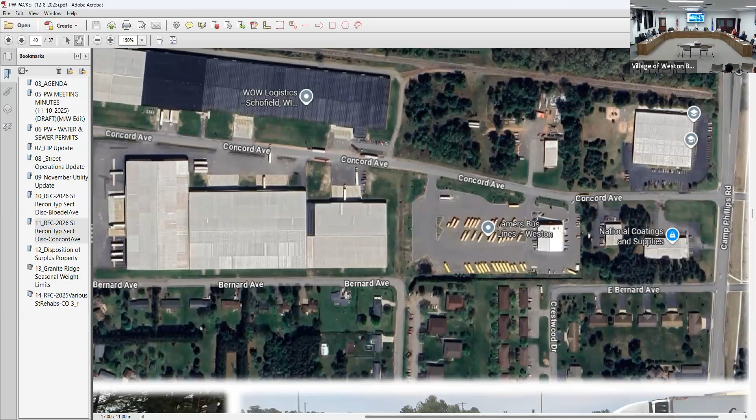How much shoulder work do you have to do there on an average year? We're probably touching it up - depending on rainfall, maybe 3-4 times a month for grading. That's a lot. Yeah, there's a lot of trucks and it gets torn up on a daily basis. And the storm sewer that's there - all the gravel and granite washes into it, so we're trying to maintain that.

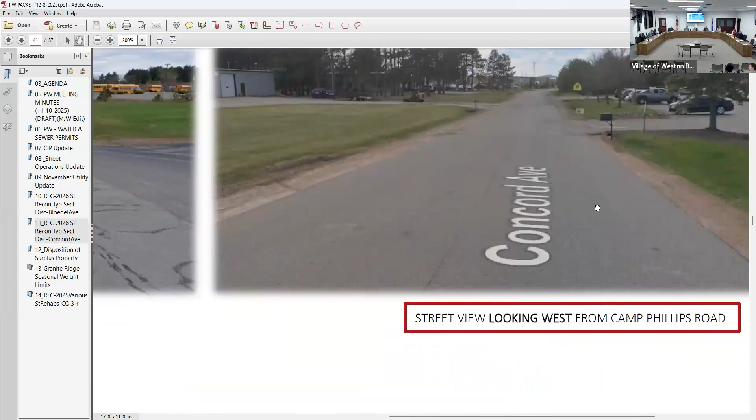The distance, they're almost backing in from the road to get to those bays. It's not like they pull onto a drive path and then do a U-turn to back into the bays. I think they typically back from the street on the south side, so you'd have a much better chance of maintaining a sidewalk on the north side, with fewer places where they're actually backing across that sidewalk on a daily basis, multiple times per day.

But isn't the problem with the trucks parking on the north side? Isn't that where they park more? So you'd have to have that. My proposal would be that you pave the shoulder on the north side in that area where WOW has their office, and have the sidewalk

just beyond that. Paved shoulder wider than 2 feet, what do you got there? Yeah, so I'd be looking to add probably about an additional 8 feet through there, and it's gonna go to your ditch, so that still leaves about 8 feet for a ditch on the back side of that.

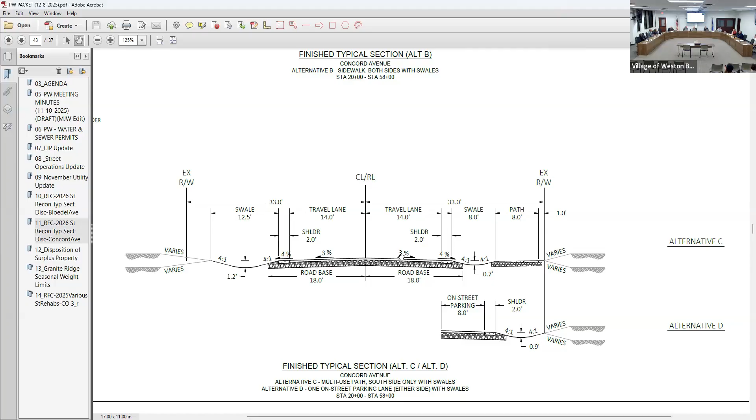But right away, I think you could work that in. 6 feet. Yeah, I think that, as Joe's looking at this, he's kind of taking option D here with this on-street parking.

And then also kind of combining it here, and we might, through that section, have to offset the road a little bit where the center line moves south, just to get more right of way over there. Correct, just to utilize the whole right of way, and then as you get past that, the road would kind of bend back and get centered again.

There'd be no sidewalk? No, put a sidewalk in addition. So you'd end up putting a sidewalk on the back side of this ditch, but this whole road would shift. So it's not really option D then, right? No, it's like an option E, you just created.

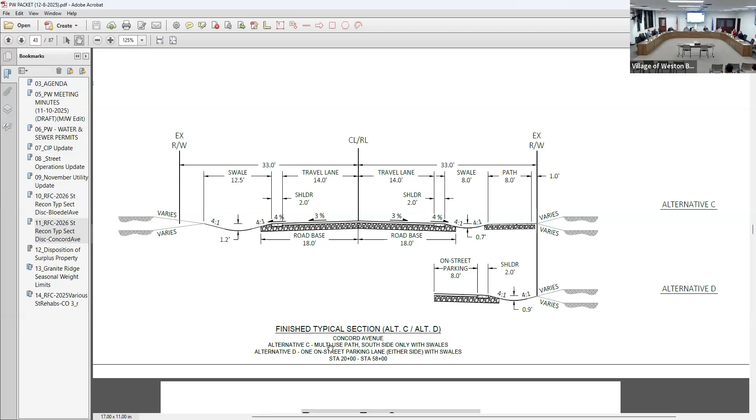Yeah, so I was reading it a bit differently. That's really what I wanted, looking for option E here. If you want to take that 8 foot path, get rid of that, and make the

road wider and increase the shoulder to 8 feet instead of 2 feet, and then put the sidewalk after that, just in a small area, not the entire length of the road, just in that area in front of the warehousing on Wisconsin. Well, I thought they were all houses there.

They're all steel buildings. I don't know what's inside of them.

But that's where they stop. So I'm talking about starting where the easement is, that goes north and south there. So where we would want to do this would be from that point there, west along the warehousing at Wisconsin, is where you'd have that wider shoulder, and you wouldn't need to do that for the entire length.

Just to accommodate like 4 trucks. Right, because all those guys are backing off the street. They're not pulling in to do a U-turn to back into a backing space. They're all backing off the road.

Michael, yeah, I think we should have that, then we can see it. Yeah, we can bring that back next.

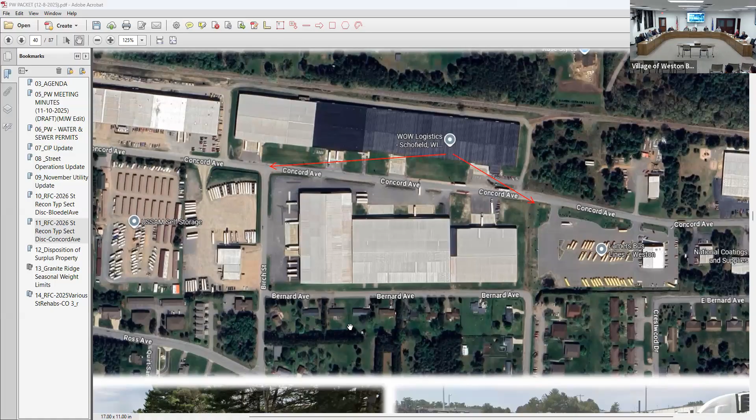That makes sense, to try and accommodate people that are walking. I'd agree that at lunchtime there probably are quite a few people that would walk, and it would accommodate the kids from the school to get into those residential apartment areas pretty safely.

Are you suggesting a sidewalk from Camp Phillips? Yeah, the sidewalk would start at Camp Phillips and go the whole project zone, to Bayberry.

Well, in a sense, you could keep it all on the north side then. Right, keep it all on one side. You'd just have to shift the road a little bit in front, and your sidewalk was maintained.

They need all the openings on the south side. What are all the vehicles parked right on the edge of the road? In front of the first building, the easternmost building, right up there. If you extend out, I don't know what's there now, but I don't think it's gonna stay there.

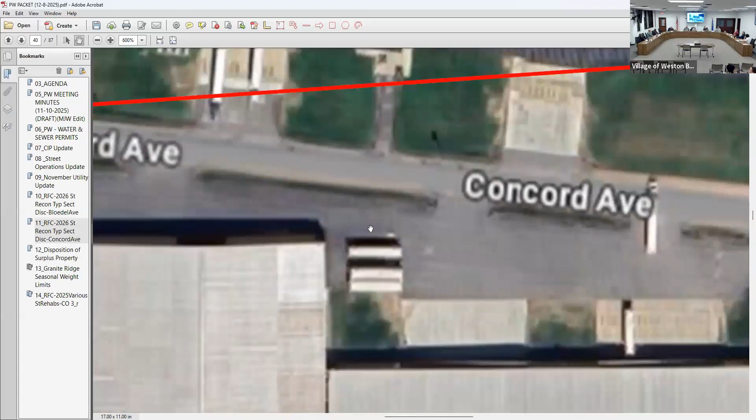See, I'm looking the other way. Are you looking here? Don't go down further, the other direction. Yeah, there, see all that, I don't know what it is. This is crystal finishing, and I don't know what that is. Are those cars? Yeah, the cars, it's the old Wausau Supply.

That's all gonna disappear then, correct? A little bit, yeah.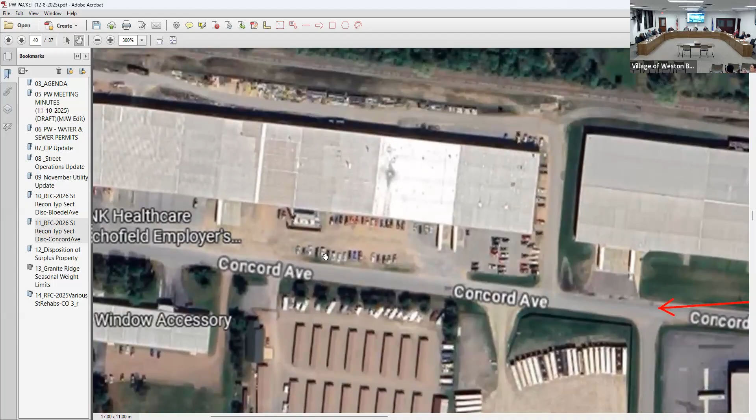I spoke with the manufacturing manager for that facility, and he said he's okay with us trying to reestablish the ditch in there, because he has some employees that just drive through there acting like it's part of the parking lot. So they were okay with that.

I met with him and got locations of where they would be okay with reducing their access, because they don't use that actively. So I have areas that line up with where their docks are active, that we'd be able to maintain and fix some of those areas that have gone out of control.

And there's roughly, well, it looks like a little over 40 feet. Like this distance between these cars is over 40 feet. So if we backed them up 10 feet...

I was just looking at the ones that are right on top of where you're gonna build. Yeah, they're right on the road. He said one of the trucks just drives in on the right of way, driving right through the ditch, well, what's left of the ditch.

All right, we'll get it next meeting. I can return with more defined plans and probably even provide an aerial so we see how this thing's changing across the whole length, with Option E as well. Yeah, Option E.

I'll do it. Right, other question? Okay, what do we do? We'll just bring it back next meeting.

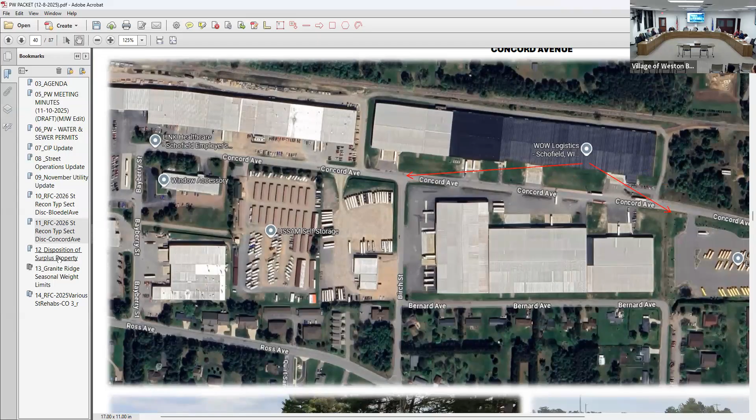Winter 2025 surplus auction item for approval. So, as we go through our seasonal changeover of equipment, we're going through items that either have been replaced or are no longer needed, kind of deemed obsolete.

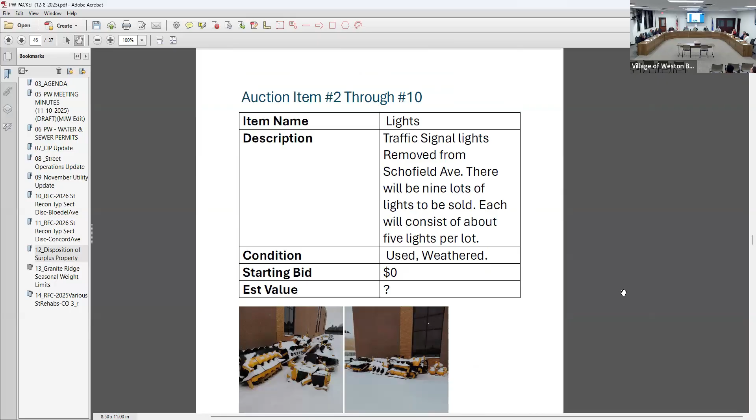Unless anybody has any questions, our big ticket item is our older sewer vac truck, a 2019 Peterbilt. We got our new one this summer, so we kept the second one for sewer cleaning, and now we're done utilizing it and have it shined up and ready to go. The traffic lights are from Schofield Ave. We salvaged the pieces we needed to keep some in-house inventory, but we don't need all those lights anymore, and some are outdated technology not used anywhere else in the village. So we have a bunch of those, plus a trailer and plows.

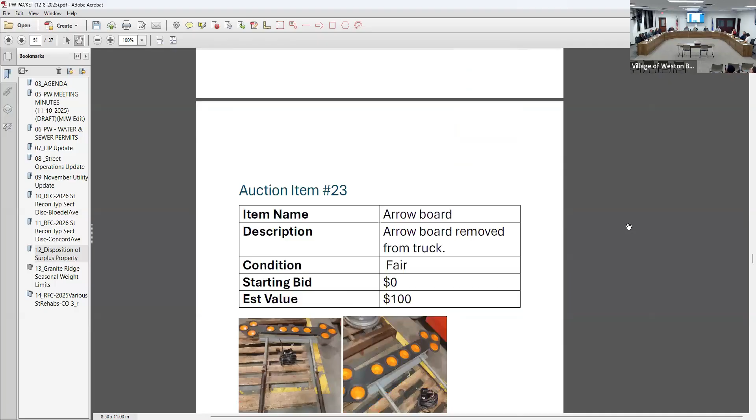Unless anybody has other questions, we're just looking to get approval to put this up for auction. I would make a motion that you proceed with selling through the entity you listed. Trying to find it—Wisconsin Surplus. Wisconsin Surplus is currently where we sell everything. Second. Michael, can you remind me?

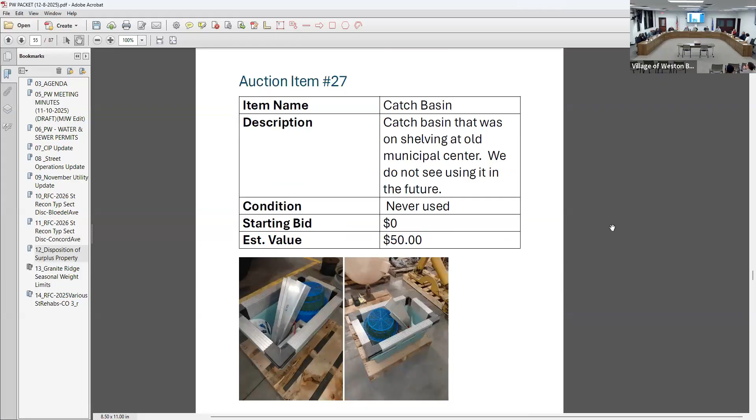I think I'm misremembering, but I thought we were going to market the vac truck through another company. There is one other auction house. Initially it sounded really good, but I'll say I lost my warm and fuzzies. They don't have a reserve—is that essentially like Public Surplus? It's called Purple Wave.

When they came here, they took pictures, grabbed schematics, and gave us a number they thought would be good for the truck—close to $100,000 less than what some of our local dealers said they would pay. So when we told them that, they said, oh, maybe we missed something, and then said, oh yeah, we missed this comparable, your truck is worth more. I guess if you're trying to get somebody's business and you undersell it that much right away, it's hard to make me feel comfortable.

The city of DeForest had a vac truck that sold for just over $290,000 on Wisconsin Surplus this past summer. Our truck has a few more upgrades than that one did. So when local people tell me it should be at least $300,000, I believe that. And somebody else comes in and says they've got all the nationwide vendors and will get us top dollar, and they say it's about $200,000—you start to not feel warm and fuzzy.

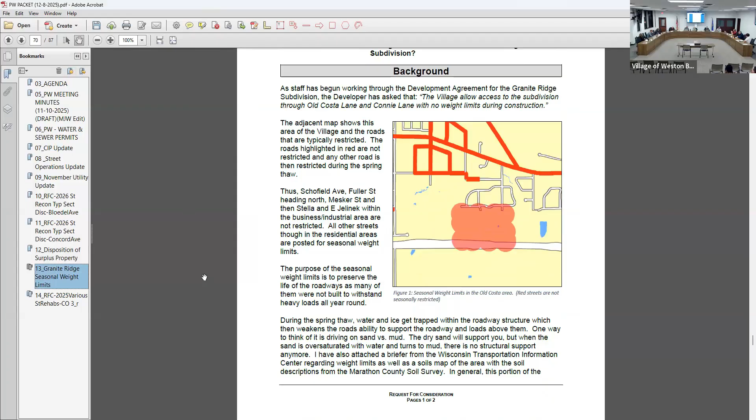Michael: we want to videotape the road and we want to keep the weight limit. Also, after it's done, we take another video and compare them. Any damage to the road, they have to repair it. Is that your motion? That is my motion, yes.

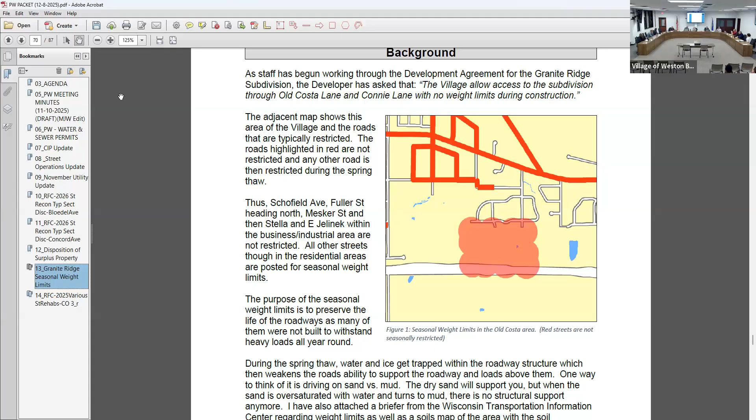Would you restate that, Troy? Okay, I move to declare the— no. I didn't write a motion in there because essentially what you said was you'd move to not change the weight limit restrictions on that road during the seasonal period. I'll second that, and also I want them to videotape it before construction starts and after construction is done.

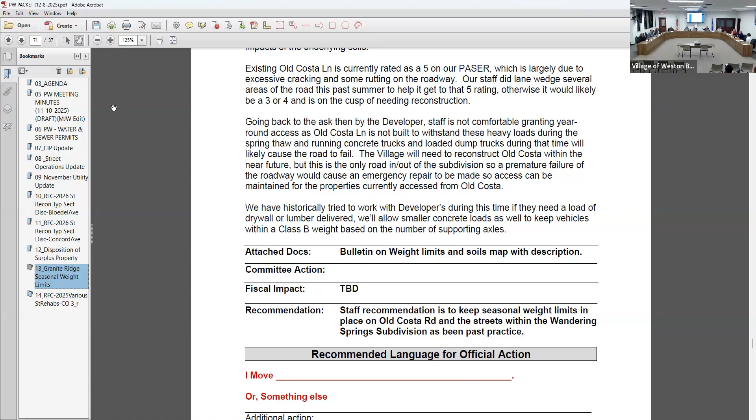How are we going to do that with snow and ice on the road? That's the only way we can see if there's any change. I'm asking how we can do it with this snow and ice on the road right now. Oh yeah, you're right—that's the hard part. If any permit is issued, I'd like your idea, but I don't know how we could do it. We could go look at it, like a month or month and a half ago we might have. Well, we can salt it and wait until the snow is gone, then take a look. We did do some extensive patching, and we might have some pictures of the road from the September/October timeframe.

Okay, so I don't see how you can hold the contractors accountable for damage on the road if you don't change directives. And I'm good with Michael being in charge, causing them to have to call him if they really want to go in there. Well, they ask for it, and they want to go and they want to use it.

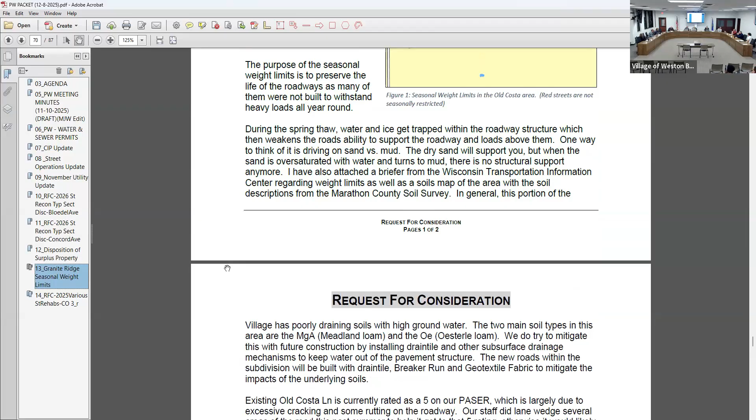Have we ever granted this to anyone else? The only other one, I think I wrote it in here, was on Birch Street when Hinter Springs was going in. At that time, Birch Street essentially fell apart and we had to close a section between Leyburn and Windsor. But the road was slated for reconstruction that year, so it was kind of okay - if the road got blown up, it was gonna get dug up anyways in May, June that year. Whereas this one, we don't have that, and there's not really an alternate either, so if something were to happen to Old Costa, that neighborhood would kind of be SOL to a certain extent.

We don't think that, just from a public emergency standpoint - if you blow the road up, what are you gonna do? That's really the biggest hesitancy I had, is there isn't another way in or out there. There's just not. No, they're gonna have to deal with the fact that we have road limits on for a reason, and plan accordingly.

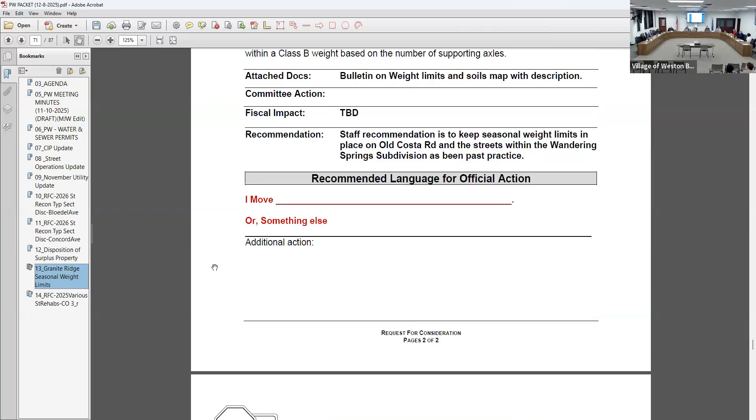Well, that was my answer and they said, can I still ask somebody else? I said, sure, we can ask somebody else. So I repeat myself: I move we keep the seasonal weight limit on the Granite Ridge subdivision. And I seconded. Other discussion? All in favor, signify by saying aye. Aye. Opposed? I have it.

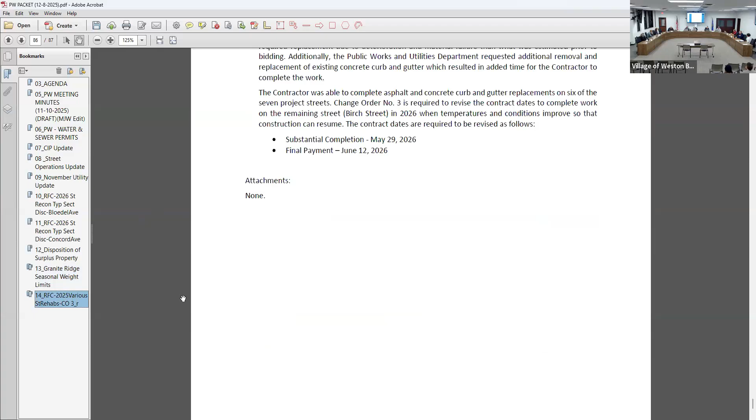Item 14, 2025 various street rehabs, change order number 3. That is only for that stretch on Weston Avenue, a very short stretch of Birch that we just ran out of time with the temperatures to get it done. We got all the concrete work done on Birch between Weston Ave and the north side where the pedestrian bridge is. We just need to pulverize, regrade, and repave the asphalt, and make any adjustments if there's manhole castings in there, but that'd be about it.

Motion to approve order 3, 2025 various street rehabs. Second. Discussion? All in favor, signify by saying aye. Aye. Opposed? I have it.

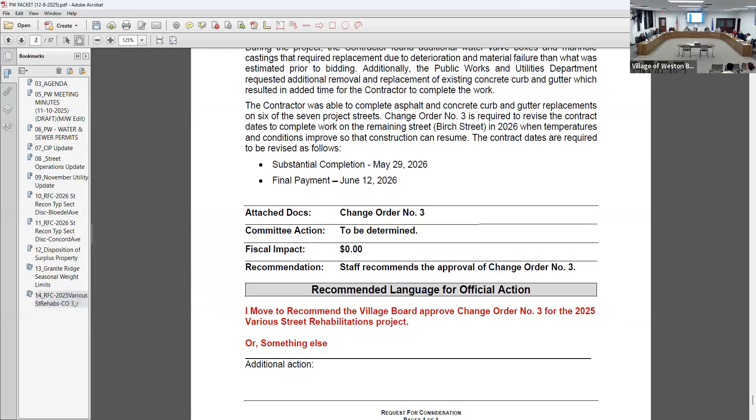Thank you. Future item 15, next meeting date, Monday, January 12th, 2026 at 4:30 PM. That's a regular meeting. Item B, Monday, February 9th, '26 at 4:30 PM. That's a regular meeting.

Item 16, topic for future meeting. Are we gonna sometime discuss this item? Yeah, I think we should. You'd made an ask and I haven't had a chance. In the next month or two, we'll get to the streetlight map and go back over that. Right, okay.

Item 17, remarks from staff. Isaac, I don't have anything. Josh, nope. Horace - friendly reminder about our transition to Harter's as of January 1. You should start to see new carts get dropped off next week, but please don't use your new carts until January 1st.

And I guess I really appreciate the discussion through the Bloedel and Concord Ave areas. I think that's helpful as staff, especially as we start doing some of these designs in-house. I want to make sure it's not just Ike and I looking at stuff and saying, oh yeah, this is great. So getting your guys' feedback and thinking of options that we don't even have on there - it's been good, so thank you. Well, thank you. Welcome.